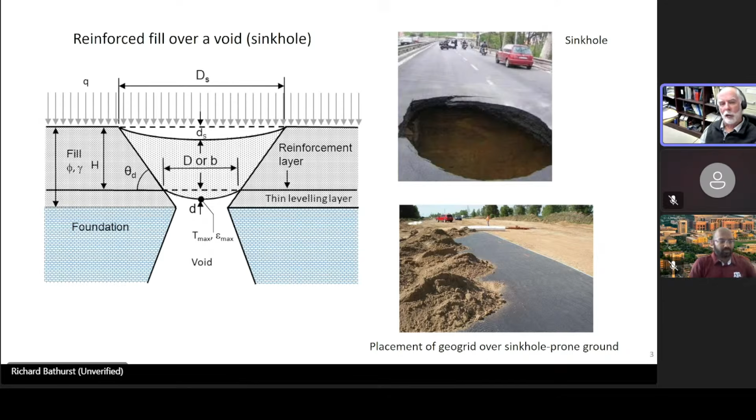In the literature, there are a number of analytical solutions for this problem, and these approaches can be found in the references that I show here. The seminal publication was by J.P. Giroud and his collaborators, shown at the top. Basically, modifications to the general approach have appeared since, and some of these analytical solutions can be found in codes in Europe, including Germany and the United Kingdom.

I'm going to, by way of introduction, give an example of the British code. And these codes, these methods that we have done, we looked at each one of them and provided a design chart approach to solve the general problem.

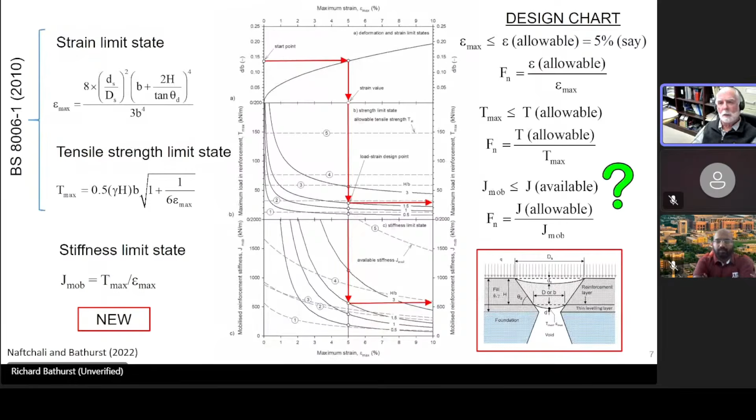So how do we get those parameters in that hyperbolic model, these J and chi terms? We can get these models from product-specific creep testing, or we can get them from correlations that we have developed, which I'm going to show you later.

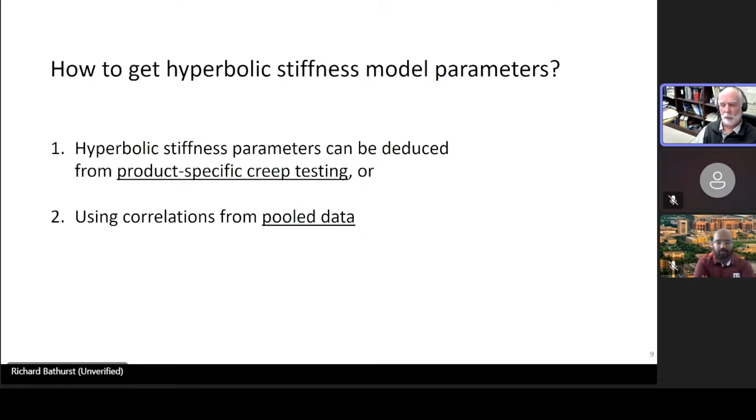For example, for a specific product, in this case a uniaxial HDPE geogrid, you can see the isochronous load strain curves that we developed from these constant load creep tests, and then you see the stiffness curves. In the legend, you can see the magnitude of those two parameters, J naught and chi, in this figure as well. So you can do this for any product.

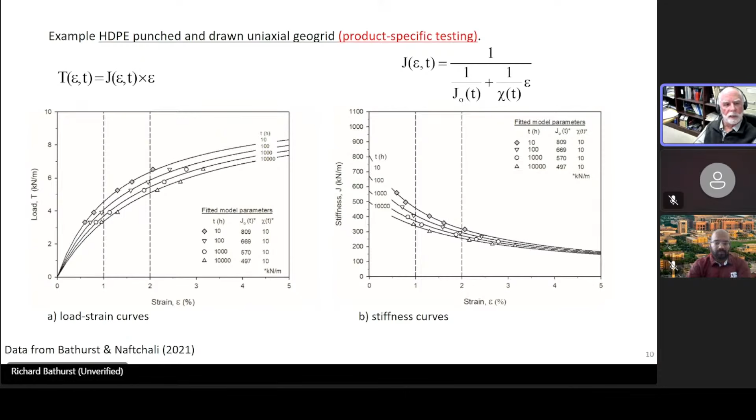An alternative way to estimate or calculate the stiffness is to use some sort of correlation. We collected a large database of constant load creep tests, and we were able to correlate the stiffness, shown on the vertical axis of the left-hand figure, with the ultimate tensile strength of the reinforcement, taken from conventional 10% strain per minute index tests, as you see on the right-hand side of this slide. What we found was a linear relationship between these two parameters.

This means that if you know the ultimate strength of your reinforcement, which is a readily available parameter, based on our interpretation of the test results, we can estimate what this stiffness parameter will be at 5% strain and 1,000 hours.

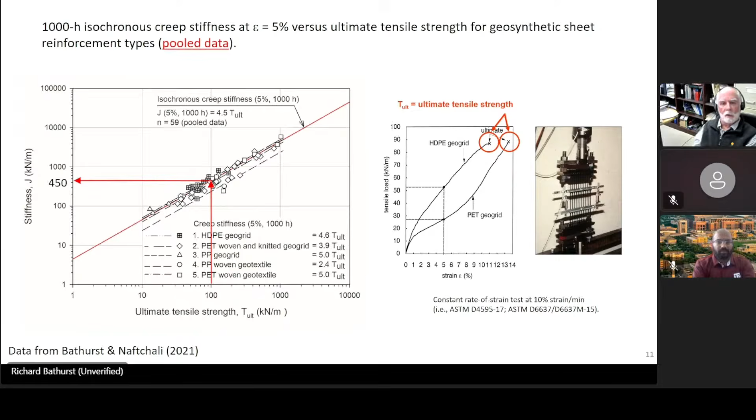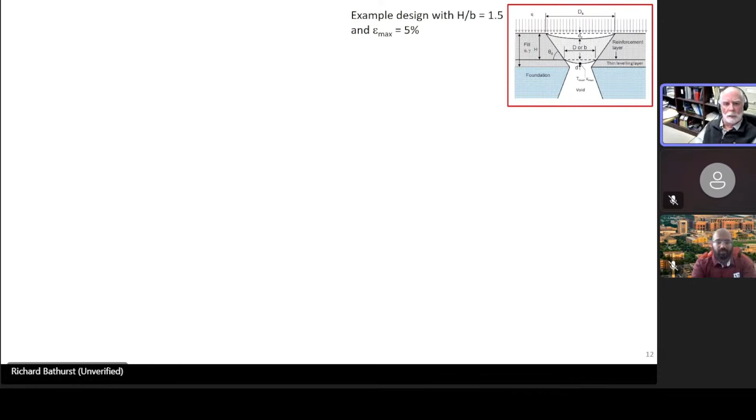Here's an example of how one can carry out a design for a particular problem, where the height of the fill to the ratio of the void width is 1.5, and we're designing to a maximum strain in the reinforcement of 5%. In this table are the properties, the ultimate strength and stiffness properties, of 5 candidate reinforcement materials for this particular problem. The hyperbolic model parameters are shown here for 1,000 hours and 5% strain.

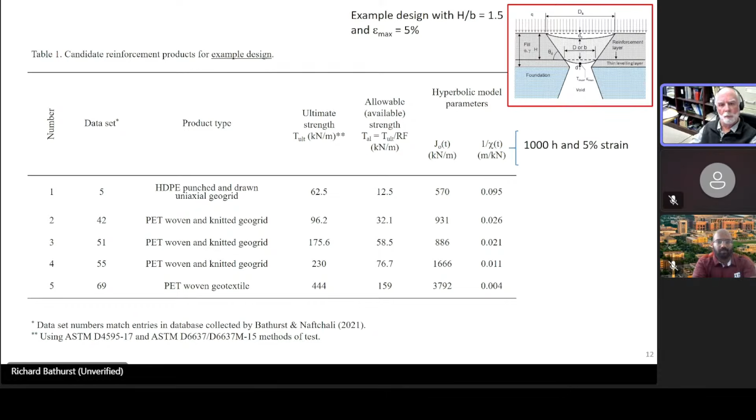Next, one uses this design chart method, in this case using the British standard. We enter the top chart again, using 5% as our target strain, which tells us the ratio of deflection to the width of the void, satisfying this target maximum strain of 5%. Then we calculate the maximum load and compare it to the allowable maximum load from our 5 candidate materials.

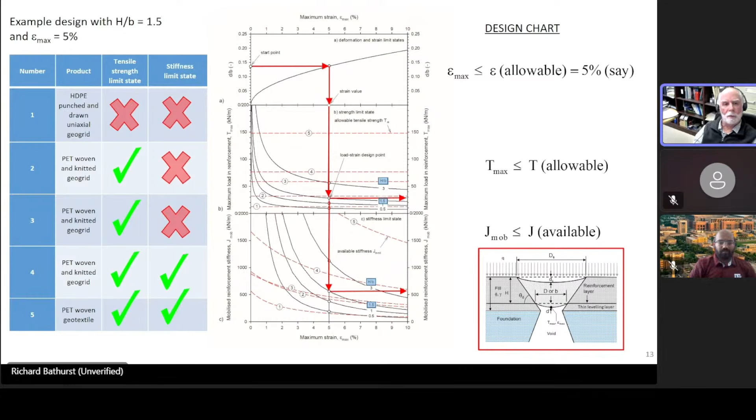From this work, we have developed a design chart method for multiple analytical solution types, including the Giroud method and the design code methods. But the thing we added to each of these methods is a new geosynthetic stiffness limit state, in order to fully complete these analytical solutions.

The model we use to calculate the stiffness is this 2-component hyperbolic isochronous secant stiffness model, which we have also used for other reinforcement applications, like MSE walls. We've shown how people can gather this data from product-specific testing, or from correlations, for example, with the ultimate strength of these products, which is easily available in the literature.

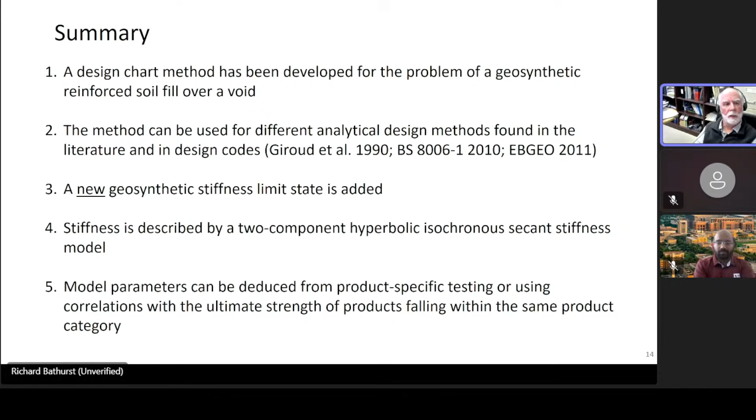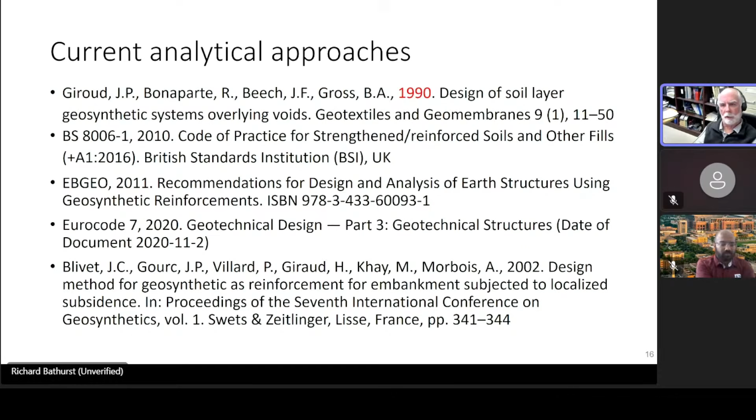So moving on, to summarize, we have these different analytical approaches available to us. Prior to starting our research on this topic, this is what was available to us and practitioners. Now, there are disadvantages of these analytical methods.

First of all, you have to assume a vertical reinforcement displacement, and then the reinforcement deformation profile is assumed in these analytical solutions. The maximum strain is then computed from the deformation shape and vertical deformation.

Another disadvantage is that the maximum tensile load is computed from maximum strain and force equilibrium, assuming a linear elastic stiffness. I think you probably agree that the stiffness of the reinforcement is not linear elastic—it's a function also of time and strain. The coupled effects of soil properties and reinforcement properties are ignored, and finally, these geosynthetic materials are rate dependent.

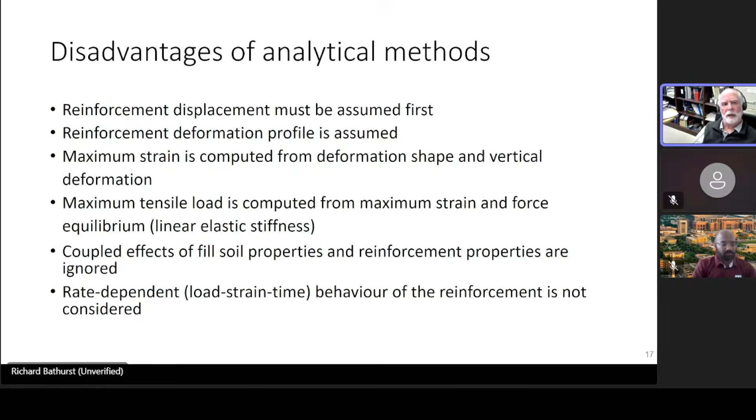So all of these factors were not considered up until the time we got involved. It's reasonable to expect, looking at this generic reinforced fill over a void problem, that as the stiffness of the reinforcement increases, the vertical settlement of the reinforcement and the fill surface will decrease.

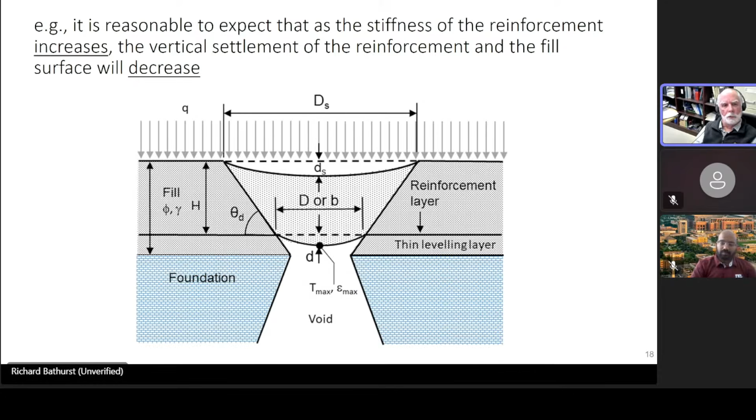And of course, we can't model that using analytical solutions. We really have to use some form of numerical modeling, and this introduces the numerical modeling that we have carried out, which is described in this presentation.

We carried out a large amount of continuum model testing, using the finite difference method in 2D FLAC. This slide shows an example geometry where the fill is half a meter in height, so this might be typical of a roadbed. There's a foundation, which in the modeling is only about 1 meter deep, but it doesn't need to be any deeper to investigate the things we're interested in.

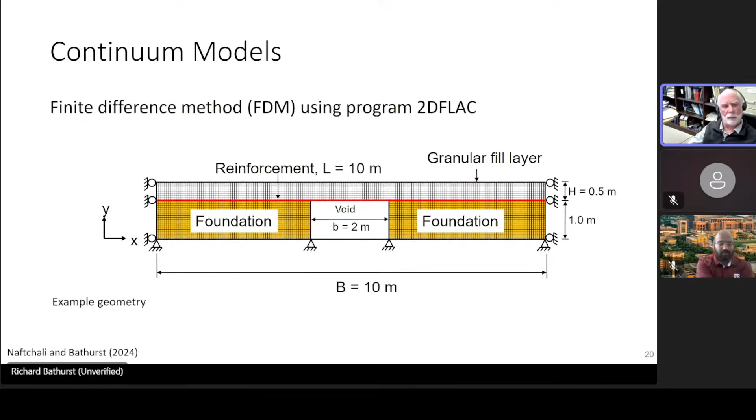This void in the example is 2 meters, but we carried out simulations for voids of half a meter to 5-6 meters or more. So this just gives you an idea of the basic numerical model we used in our study.

However, one must first develop some confidence that your numerical model is going to give reasonable and useful results. So before we launched into this huge numerical modeling program, we found some physical tests at field scale that had been carried out by Villard and Briançon.

What they did is create at a field site an excavation in a soil foundation. They filled that void with balloons, placed the reinforcement and fill on top of it, and also surcharged the surface at intervals. Then they deflated the balloons, and this created the void.

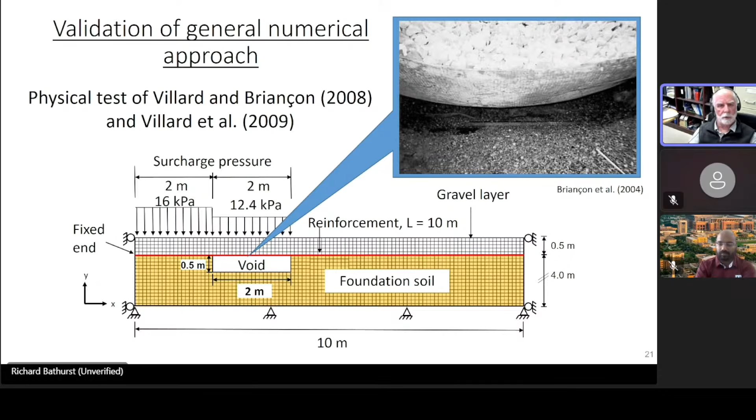In the photograph at the top right, you can see the void and the deflected shape of the reinforcement. This experiment was monitored with strain gauges, and the deflections were also measured.

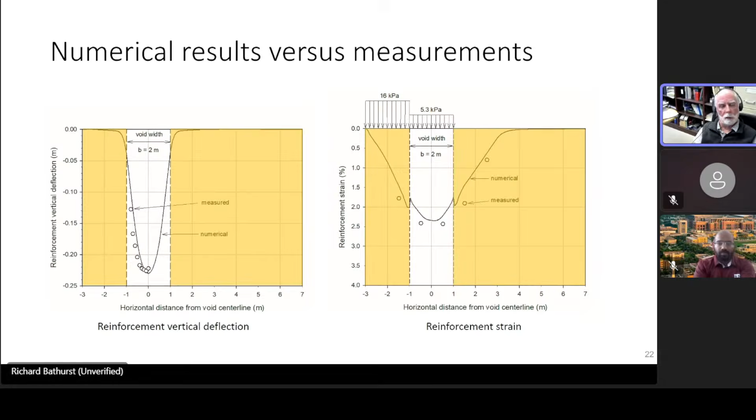So with confidence in this model, we carried out a parametric study, and we varied the input parameters to this problem, including the geometry and the properties of the materials. You can see we used a range of unit weights, friction angles, and cohesion for the fill soil. We looked at a range of geometries with respect to height and width of the void, which gave us a range of height to void width ratios.

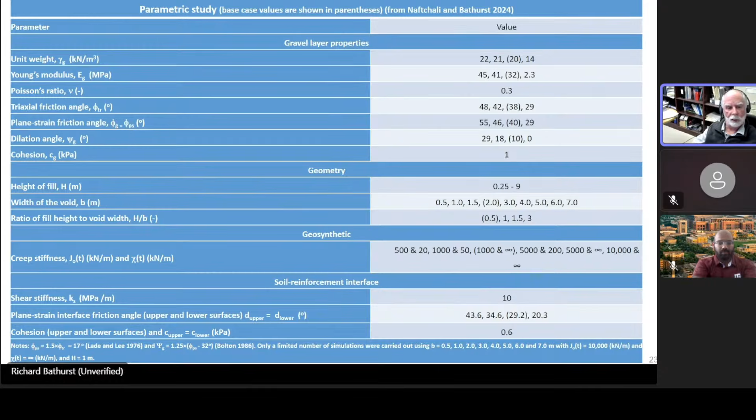And then, of course, we looked at the effect of the reinforcement stiffness parameters that you can see here. In fact, Fahimeh carried out 412 simulation cases, so it's a huge database of, if you like, synthetic data.

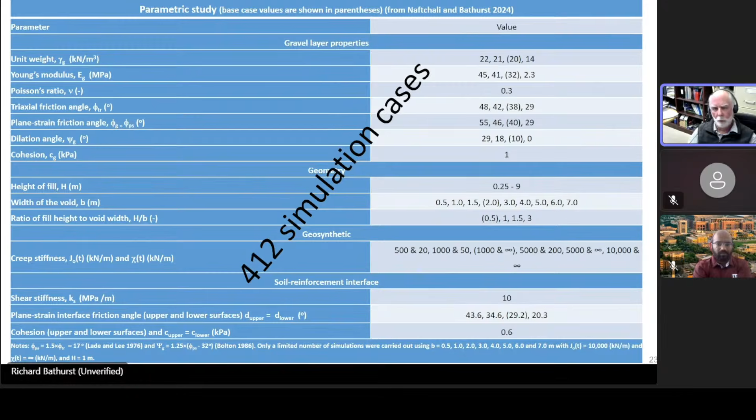In the simulations, we used our 2-component hyperbolic isochronous secant stiffness model, and this model was implemented in FLAC.

This parameter, actually it's chi, was most responsible for capturing the creepiness, if you like, of these reinforcement materials. So if this value is very, very high, approaching infinity, then basically our reinforcement is linear elastic. But as it becomes more load and strain dependent, then this value becomes smaller and smaller.

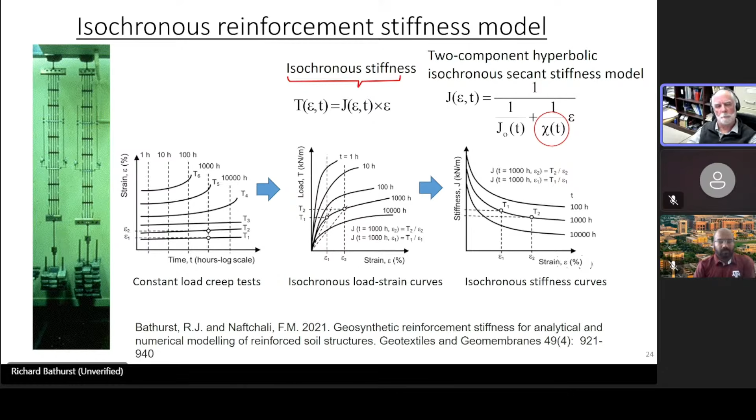Here is an example of some numerical results. What you're looking at is a half width of the void. The 0 is the center of the void, and 1 meter in this particular example is the edge of the void. Here we've run a number of simulations where the only thing that was different between each simulation was the stiffness of the reinforcement. What you can see is that as the reinforcement gets stiffer and stiffer, the deflection at the bottom of the fill surface at the elevation of the reinforcement becomes less and less. This is in sympathy with our expectations.

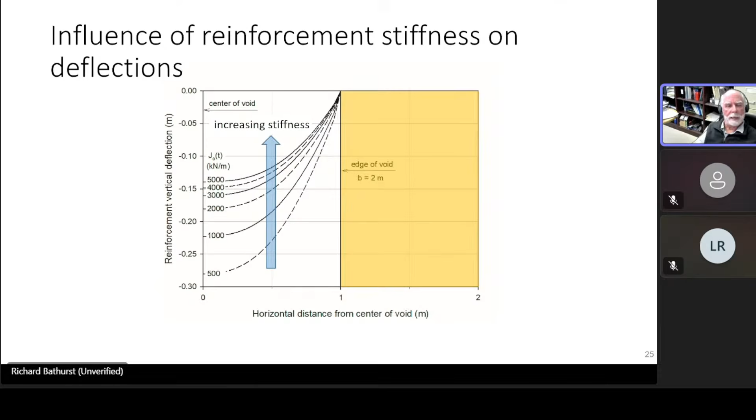This slide here is looking at the influence of reinforcement stiffness and void width on tensile load. What we did in our presentation here is we looked at two different cases: one on the left with a relatively low stiffness reinforcement, and on the right, a relatively stiffer reinforcement. Because the problem is symmetrical, we can show two cases at the same time.

So what you see here on the right-hand side, as the width of the void gets larger and larger, from 0.5 to 3 meters, you can see that the tensile load in the reinforcement goes up. I think that makes intuitive sense. But the actual magnitudes are sensitive to whether you have a soft reinforcement versus a stiffer reinforcement, so you can see the tensile loads are less for the softer or less stiff reinforcement.

The other interesting thing you can see here is that the peak tensile loads do not always occur at the center of the reinforcement. As soon as you get above a void width of about a meter, you can see that the maximum loads in the reinforcement were actually at the edge. This is a phenomenon that you cannot capture using an analytical method of the types that I've mentioned earlier.

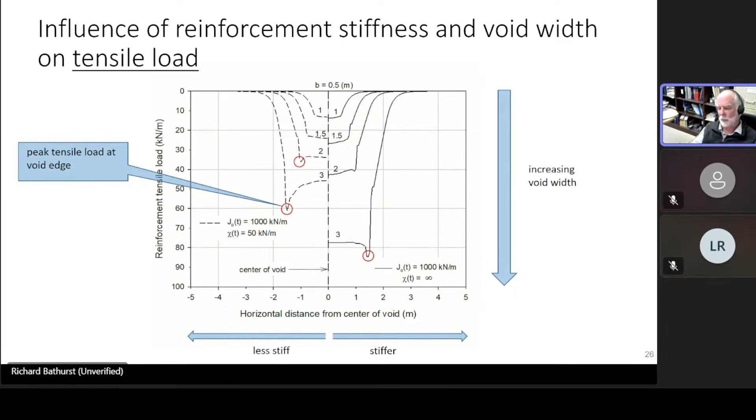But again, the tensile load is a function of the stiffness of the reinforcement and the void width. So here, again, on the right-hand side, you can see that the loads are highest for the stiffer reinforcement, which is not unexpected because we all know that in structures, if you have a stiff element, it tends to attract the load. And this is the same thing that happens in our problem.

Here you see a slide in which we have again stiff reinforcement, less stiff reinforcement, but what we have varied here is the ratio of the height of the fill to the width of the void. It's interesting, you can see that it really doesn't have a major effect on the reinforcement strains.

But again, the strains are much higher for the softer cases, and you can see that the maximum strains are at the edge of the void. In this particular example, if one used the more creep-prone reinforcement, then you're going to have strains that exceed the maximum allowable strain of 5%. So this would disqualify these particular reinforcement products because they do not satisfy the strain limit state.

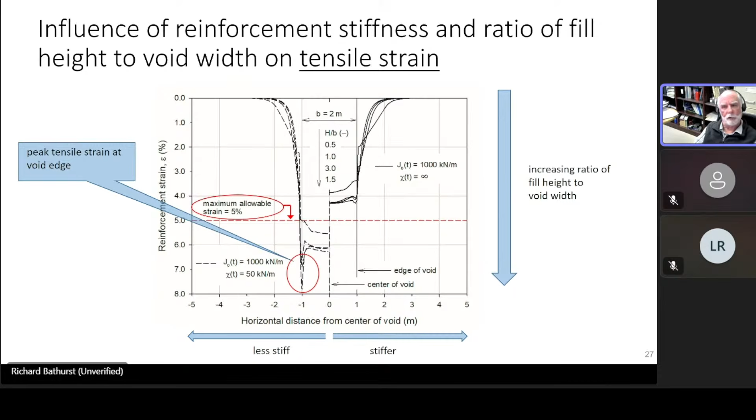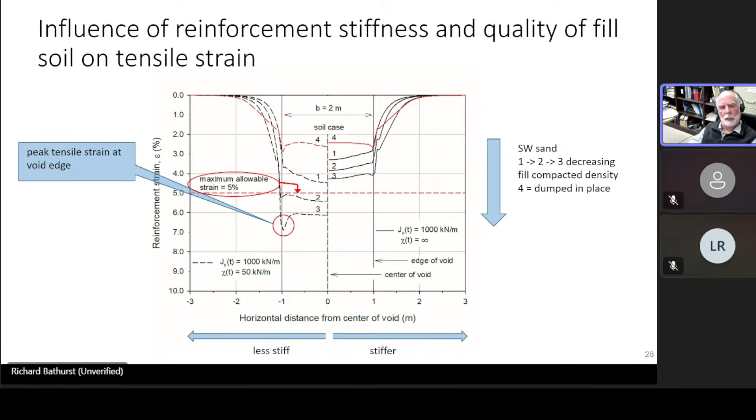So from this work, there was a paper that was published together. You can read this paper and get details. The paper records a number of important conclusions and observations. They're listed here. I'm not going to go through them in detail.

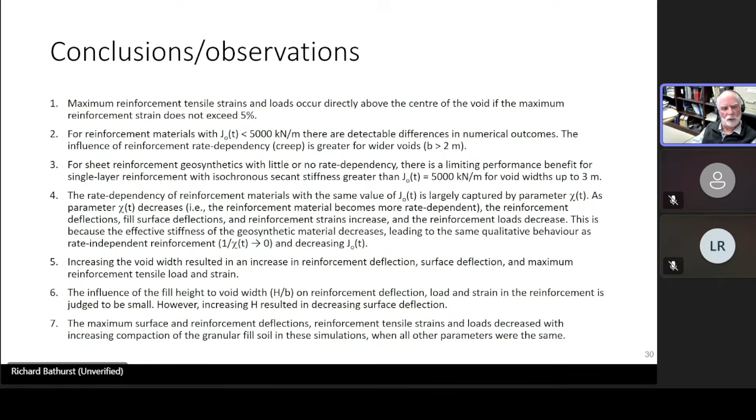Some of them I've mentioned already. For example, that the maximum strains, provided we have a reasonable width of void, should not exceed 5%. And as the void width increases, we get increasing reinforcement deflection, surface deflection, and maximum reinforcement tensile load and strain. So you can read this paper at your leisure.

But now what I want to do is move to the third part of my presentation, which involves the probabilistic design for the reinforced fill over a void problem. What we're finding in geotechnical engineering and in reinforced soil technologies, of which one is this problem of a reinforced fill over a void problem, is a movement towards design based on probabilistic outcomes, so that we can describe margins of safety in terms of the probability that a limit state is not satisfied.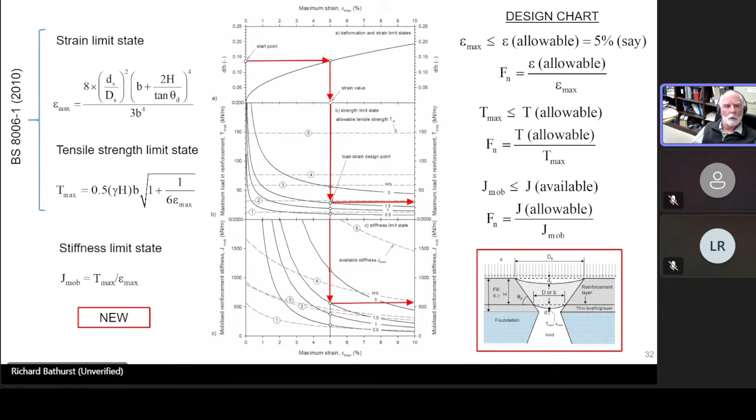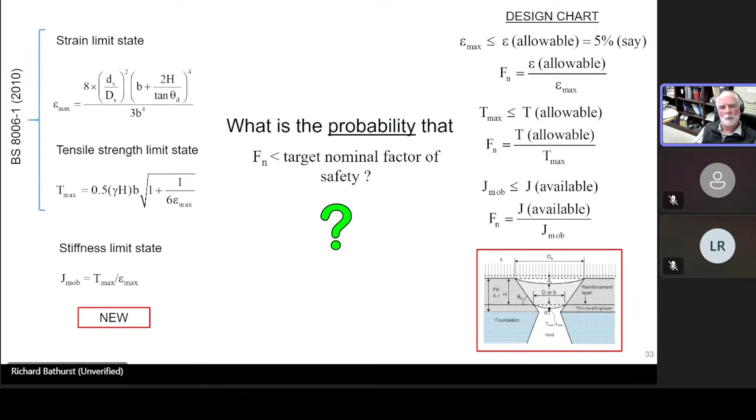The question then is, what is the probability when we do this design that the nominal factor of safety will not satisfy the target value that we have assumed from simple deterministic analyses? This is a challenging question, because when you look at each one of these limit state nominal factor equations that you see on the right-hand side, there is uncertainty. There's uncertainty in the magnitude of the computed tensile strain using your formula here for the British standard, or an equivalent formula for any one of the other methods that I introduced before.

There's uncertainty in the magnitude of this computed maximum load. And because there's uncertainty in the strain and the load, there must be uncertainty in the mobilized stiffness of the reinforcement. So we have uncertainty in the strength, the stiffness, and this uncertainty can be understood to be due to model accuracy.

This means when we say model accuracy, we can quantify the model accuracy as the ratio of one of these measured quantities, nominal values, and the value that's predicted — measured to predicted. If you had a perfect model, then anything you measured would be the same as what you predicted, and therefore the bias value would be equal to 1. This does not happen in geotechnical reinforcement, soil structure interaction problems.

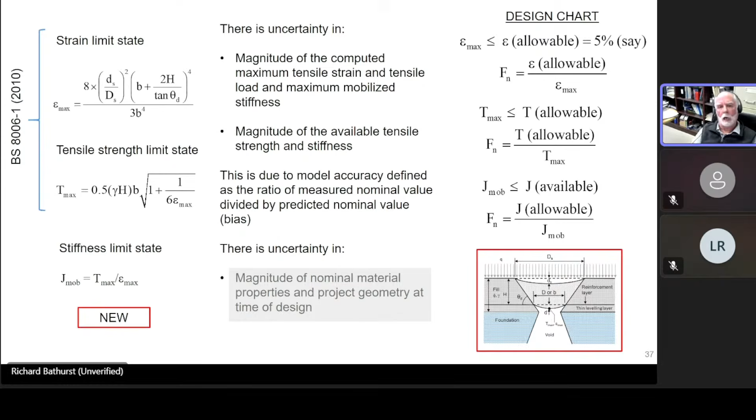It's not a single value outcome. Let me demonstrate for the case of reinforcement stiffness. The model bias for the calculation of stiffness is the measured or true stiffness value against what you're predicting. If you have product-specific data, which you often have, gathered from tests like constant load tests or stepped isothermal methods, the mean of your predicted values and measured values is about 1, and the spread, the coefficient of variation, is about 6%.

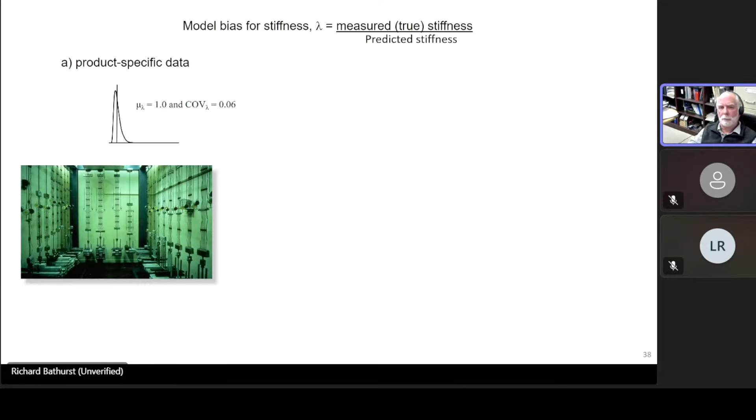If, however, I use this correlation between tensile strength that I showed you before and the stiffness, so that from my nominal value of tensile strength I estimate what the stiffness is going to be, there's some scatter. And from collecting data from products from the same product line, the spread is about 20% on your estimate of the stiffness.

If you simply take all of the stiffness versus tensile strength data that we were able to collect—and we were able to collect several hundreds of these type of data—and then you just use this overall correlation between ultimate strength and stiffness, then the accuracy in terms of spread, the coefficient of variation, is about almost 30%.

Now, this curve on the right-hand side is quite useful, because it says that as long as your product falls within the envelope of products that we investigated, you can make an estimate of what the stiffness is without having to actually test the material. So that has some advantage. It's also useful for carrying out parametric analyses.

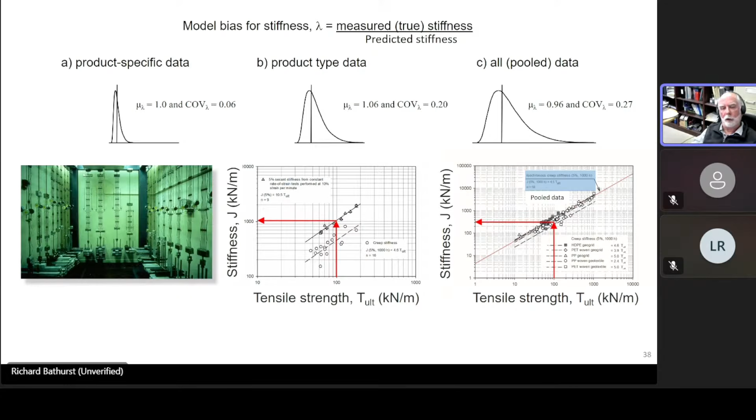However, the slide shows that there's increasing uncertainty in the estimate of the reinforcement stiffness using this hyperbolic model as you go from product-specific testing to product type data testing to pooled data testing. So there's an argument that says use product-specific data if you have it, because that'll increase your confidence in the estimate of the nominal factor of safety for each one of the limit states that we talked about.

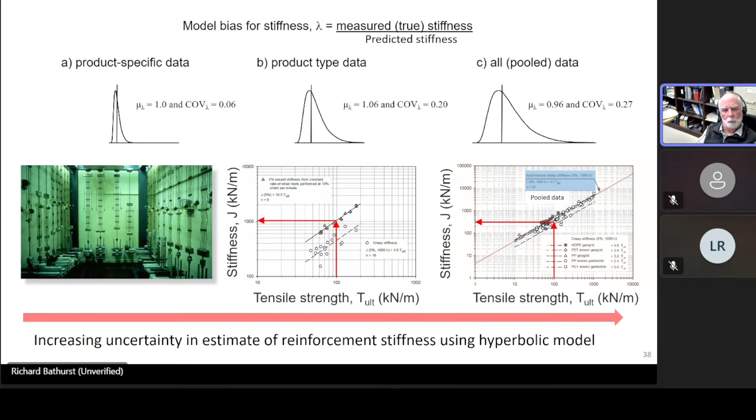So I want to warn you, I'm going to show you an equation that looks pretty scary. What you see here is a closed form solution. This solution allows you to calculate the reliability index for any one of those three limit states that I've described to you, provided you have the bias statistics and the statistics for the nominal values that you put into your limit state equation.

And it's color coded, so the green terms represent the uncertainty in the input parameters that you use at the time of design. The yellow terms are statistics related to the accuracy of the model, and there can be correlations between model accuracy and the nominal value, so they're in blue.

And then you see in this equation the nominal factor of safety. So this is the factor of safety that you would calculate based on your best estimate of the nominal resistance and the nominal load at time of design. This is the old deterministic way of doing things.

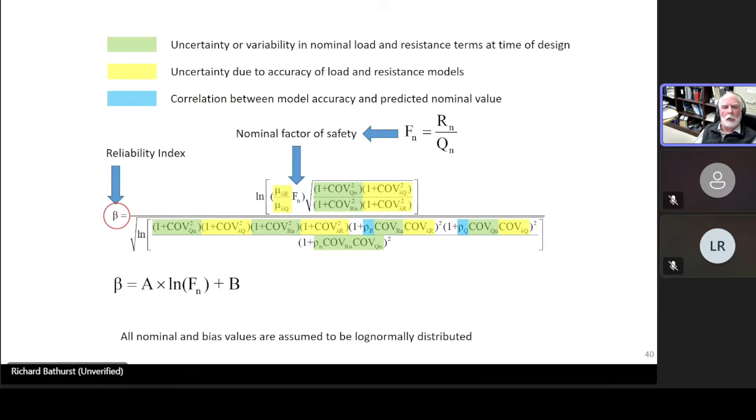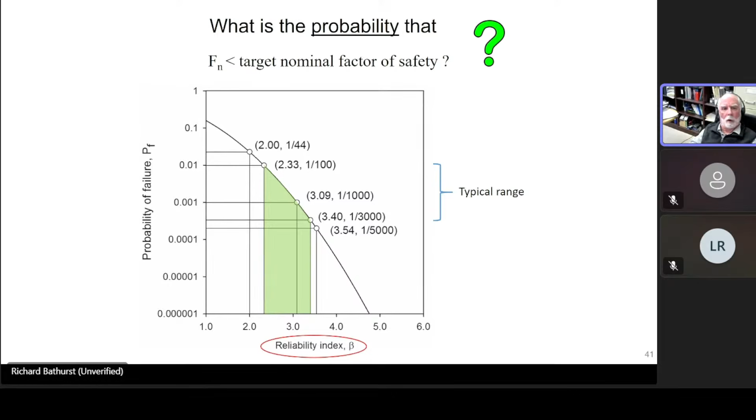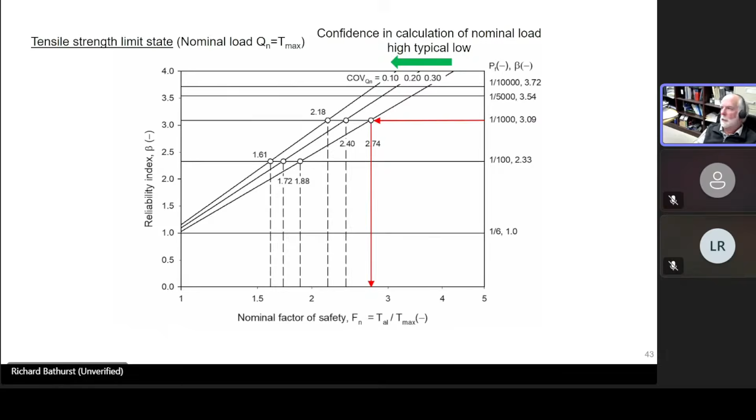So based on this portion of my talk, I can summarize by saying that reliability-based design provides a more nuanced appreciation of margins of safety, quantified as the probability that a limit state is not satisfied. In other words, if you design for simply a target factor of safety using nominal values, you know you're safe, but you really don't know how safe you are in terms of probability that your nominal factor of safety is going to be satisfied.

Another thing that has come out of this work is that by providing this closed form solution, it means that you can put this equation into a spreadsheet and you can do these types of parametric analyses yourself and create those curves for beta versus nominal factor of safety that I showed you. The other thing that's an important contribution is we have quantified the influence of model accuracy, or what we term model bias. And this is a novel contribution to this particular design problem.

The method, by introducing measures of the confidence in our values of nominal load and nominal resistance at time of design, introduces engineering judgment. A complaint that folks often have is that when we use probabilistic design, we can't introduce human uncertainty, but you can do that explicitly here by assuming different levels of confidence in your design and selection of parameters at time of design.

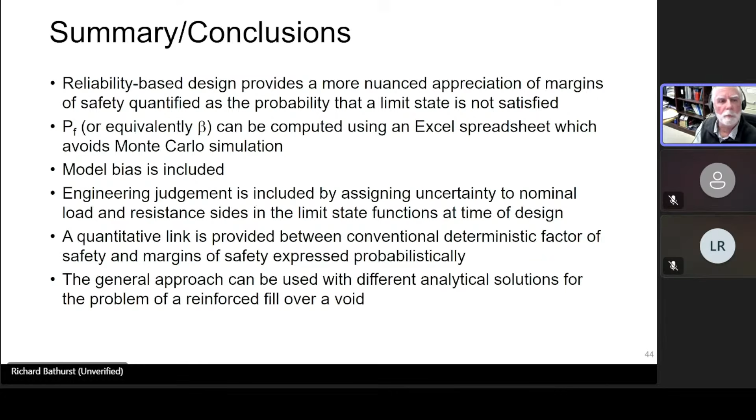So the results of all this work, and I've taken this from a bunch of papers, and again, Fahima did all the heavy lifting, and she's a super PhD student. For the professors that are out there, she wrote a manuscript thesis of 5 chapters, and each chapter became a paper in a credible journal, and each one of them won a best paper award. So I think that any of you professors out there, I'm sure, are quite envious. So I thank Fahima again for her good works.